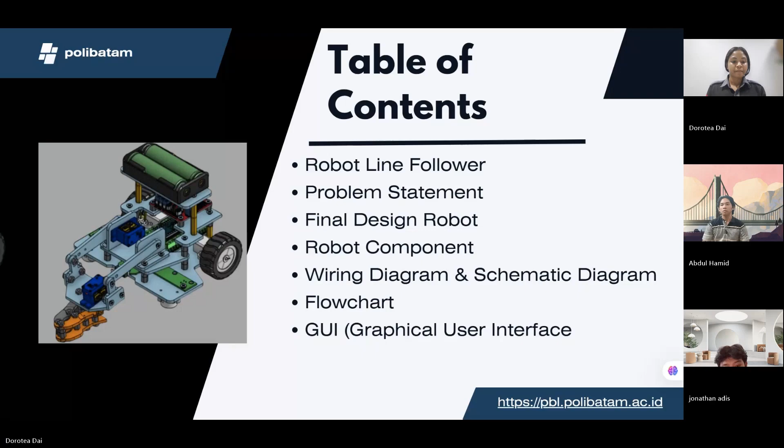Robot line follower: this line follower robot is an autonomous mobile robot designed to follow a white line on a black surface. It uses line sensors as its navigation system.

It is equipped with two DC motors that drive the main wheels, as well as a free wheel or caster wheel for balance. A mechanical arm and gripper controlled by two servo motors are located at the front of the robot, allowing it to pick up and place objects with precision.

All electronic components, including the microcontroller, motor driver, and Bluetooth communication module, are mounted on a two-layer chassis and are powered by two 18650 batteries, in addition to operating automatically.

The robot can be controlled wirelessly through a graphical user interface via Bluetooth. This makes it a fully integrated robotic system that combines mechanical, electronic, and programming aspects into one functional, efficient unit.

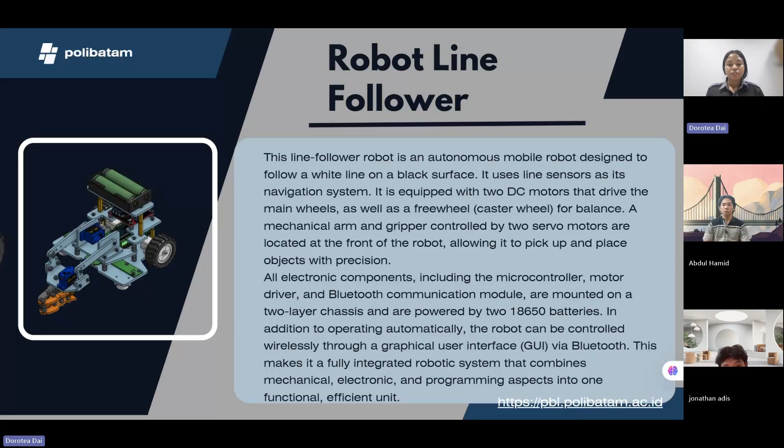Next, problem statement: line follower robots often struggle to navigate complex paths, such as T-junctions, due to limitations in accurately detecting and making directional decisions. This causes the robot to lose its path.

Solution: to overcome this, a system that is more intelligent in detection and decision making is required. In addition, Bluetooth control is added so that the robot can be controlled manually through the graphical user interface or move automatically according to the program, and is able to pick up and place objects from one point to another.

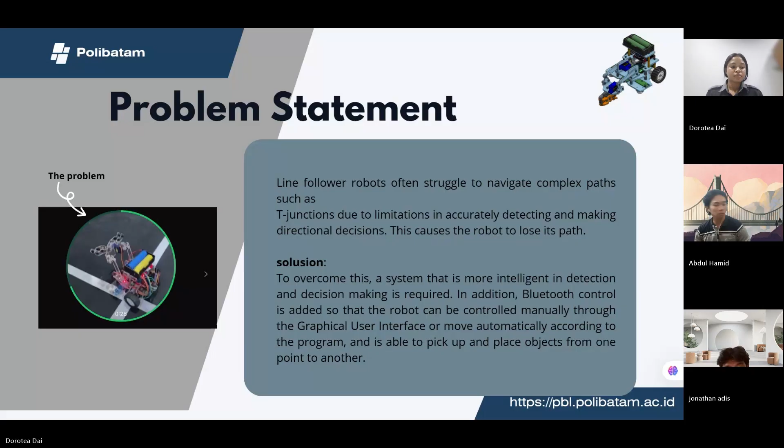Next, final design robot will be explained by Jonathan.

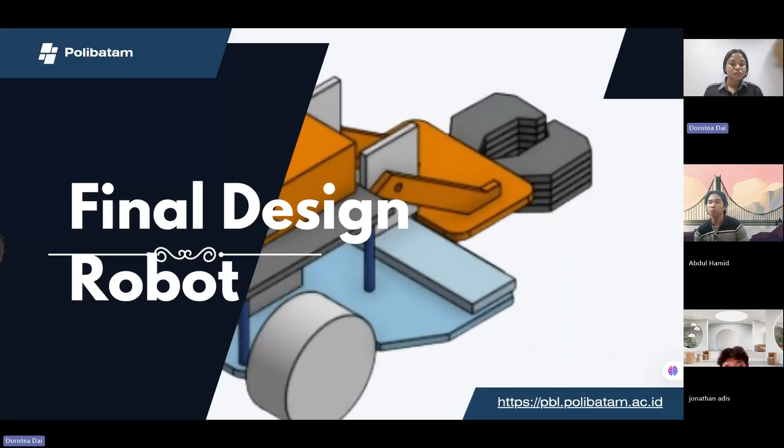Here is our final design robot line follower. The new design aims to be more compact and space efficient, stronger in small parts, and easier to assemble, thanks to the set layer structure that gives it a clean, organic look.

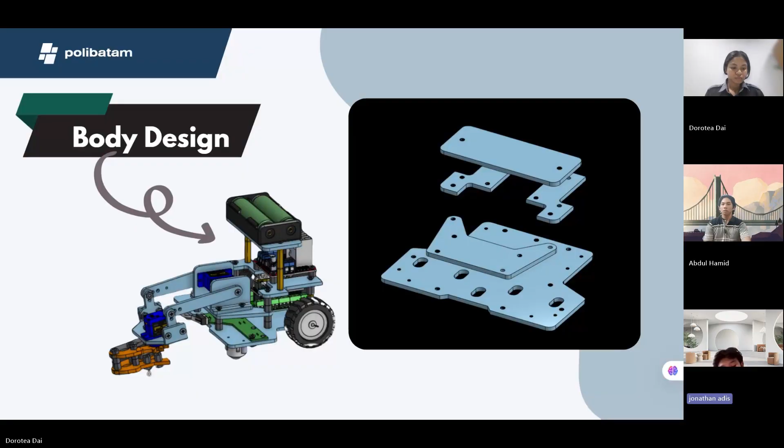As for the gripper, there are adjustments as will be explained in the next slide. The gripper was designed with a wider gripping area to handle various objects more easily.

The arm is now adjustable in length and height, improving flexibility. Also, the position of the servo motor arm was lowered for better stability and performance during object handling.

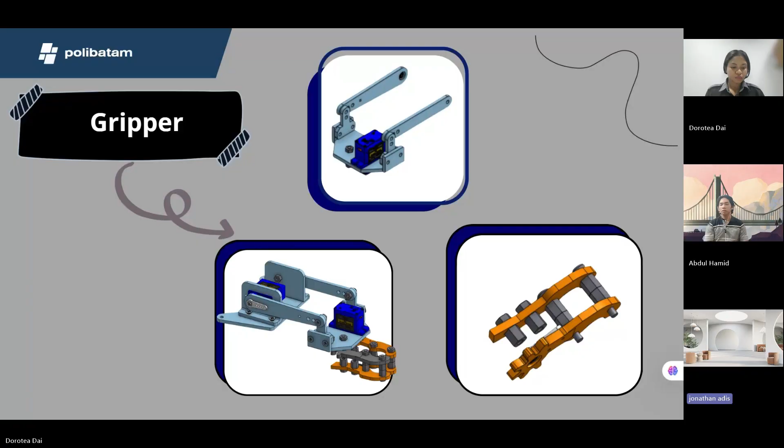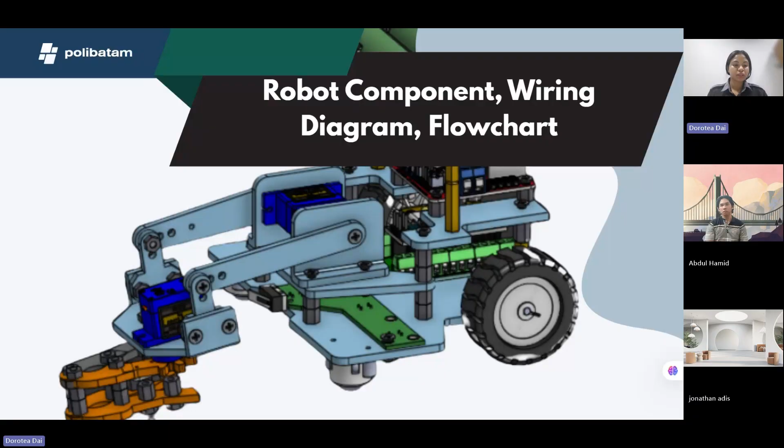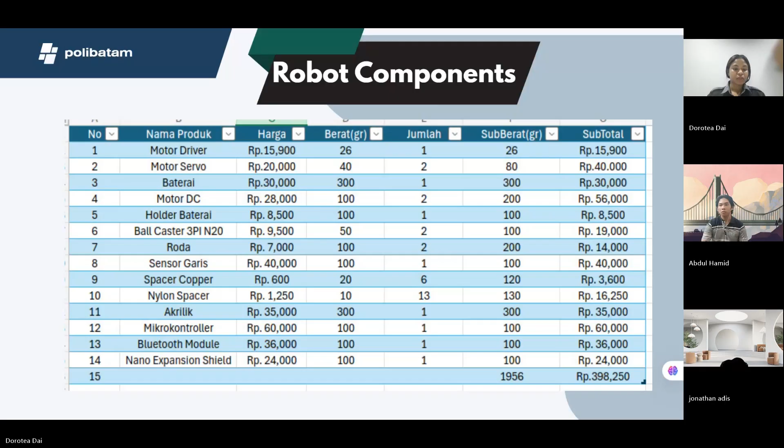Next, this is the wiring diagram and schematic diagram. In this section, I created an electronic circuit schematic and a wiring diagram to serve as a guide for connecting the components of the line follower robot system.

I developed the schematic using Fritzing software to clearly visualize the wiring and pin relationships within the microcontroller, for example Arduino, motor driver, line sensor, servo, and power source.

The purpose of this schematic is to ensure each component receives the appropriate power source and is properly connected to the microcontroller's control pins, allowing the system to work optimally.

This schematic also serves as a foundation for physical assembly, helping to prevent wiring errors and ensuring that the robot's workflow runs according to the design.

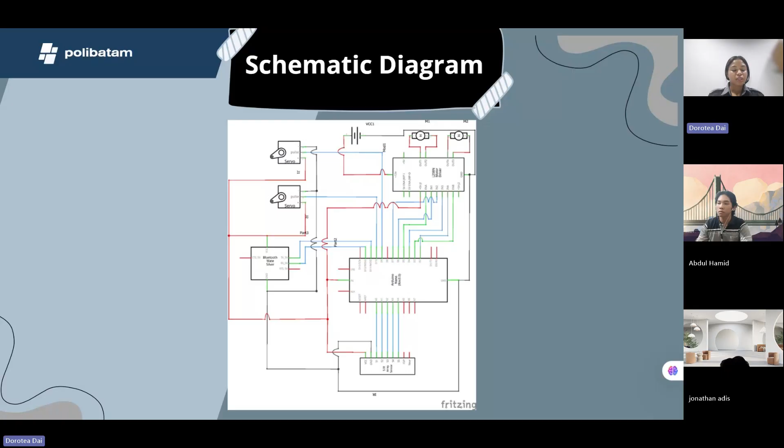Next, graphical user interface will be explained by Abdul.

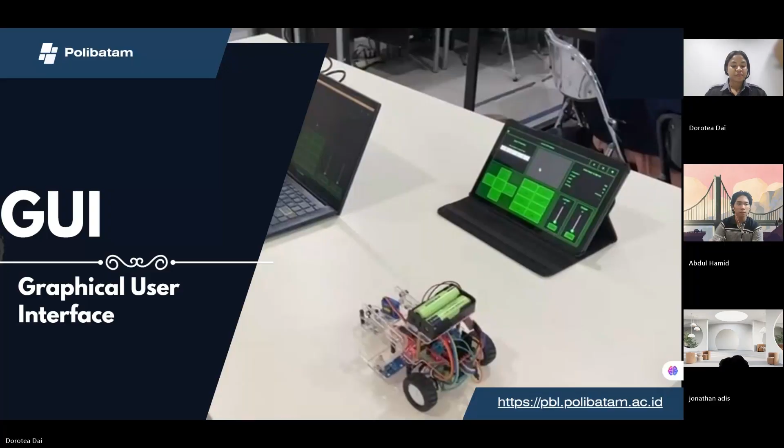Okay, so first of all, our GUI has a final target: it must be usable on both Windows and Android, wirelessly. So several features are available as follows.

For robot controls, we first have a canvas to simulate robot movement and monitor data from the robot. Second, a debug terminal feature to view, send, and receive data and communication problems. Third, a settings feature is available to enter the port and change the command sent.

Next are the settings in the GUI, where you can change the port used.

If you are using Windows or Linux and have successful serial communication, just add a Bluetooth component and look for a Bluetooth port. Then wireless communication can succeed without changing the GUI or backend code.

In Android, using Pyjnius, unlike Windows which uses serial, only the GUI is changed, with the same backend used as in Windows.